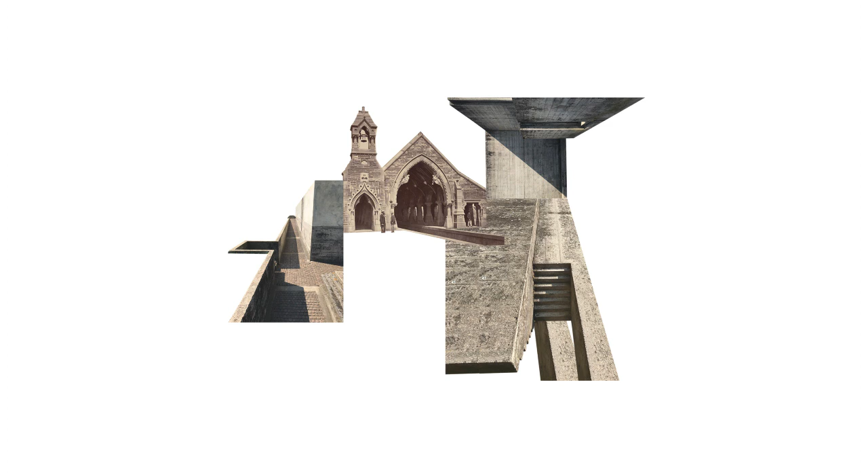This studio explores the junction between utilitarian and civic architecture while testing these conditions through the lens of assisted death.

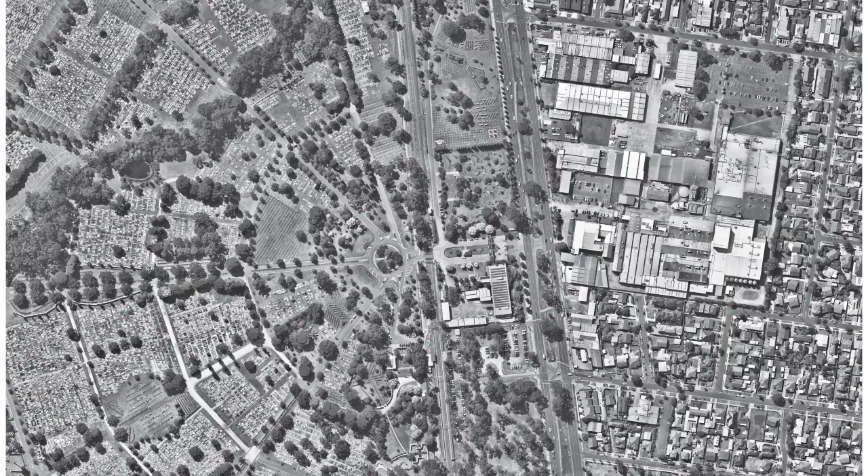Cemeteries inherently are governed by metrics and the utilitarian infrastructure that has been implemented in order to service, access and maintain the necropolis. Fawkner train station opened in 1886 and in 1906 Fawkner Cemetery opened, absorbing into its site the train line and station, a train that provided for the transportation of coffins and mourners, a train station that serviced the city of the dead.

As cemeteries have evolved over time, there is an acknowledgement that there is still a requirement to provide for a variety of forms of burial and remembrance. The predominance of the field versus garden, spaces of inclusion, spaces defined by religious boundaries, spaces defined by acknowledgement type. Each cemetery is accompanied by various additional built programs, such as the flower shop, crematorium and chapel.

With the introduction of assisted death legislation in Victoria in 2019, Greater Melbourne Cemetery Trust are now in the process of understanding how this might be accommodated within their remit. What is the infrastructure that would define this program?

The Design Studio explored the role of the cemetery through the lens of now and the growing requirements associated with death and remembrance. This was balanced with understanding the historical significance of the infrastructure that defines the mechanics of the necropolis and how this might then be exploited in order to define a new appendage to the cemetery.

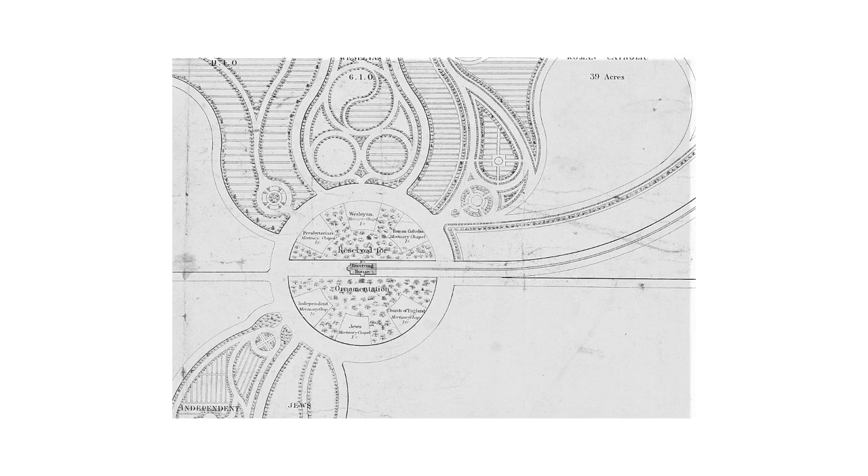Students reference the following precedents: Saint-Pierre Firminy by Le Corbusier, San Cataldo Cemetery by Aldo Rossi, and Brion Cemetery by Carlo Scarpa. These precedents are understood within their original context and then tested within the context of Fawkner Memorial Park. The precedents are then used to inform the formal and architectural language of the interventions that have been designed.

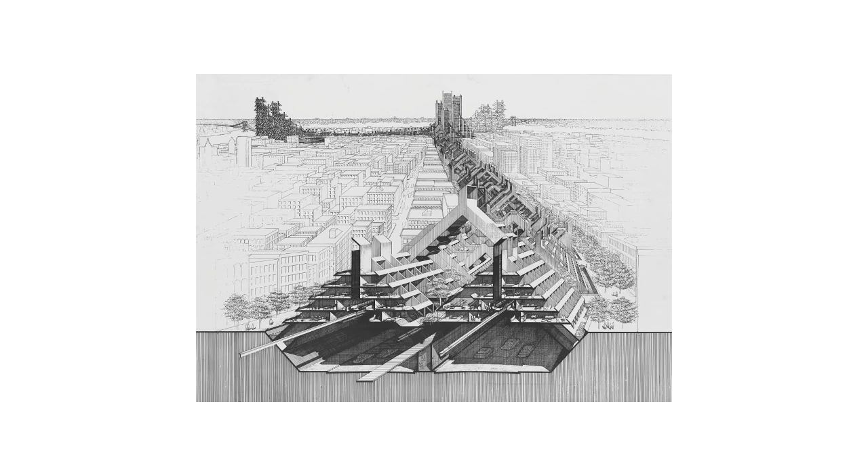Paul Rudolph's sections are employed as a drawing precedent, defining a universal representation style, allowing for the architecture to rise to the top. This is not about death, this is about infrastructure - an infrastructure that supports a civicness, a civic intervention, a civic responsibility.

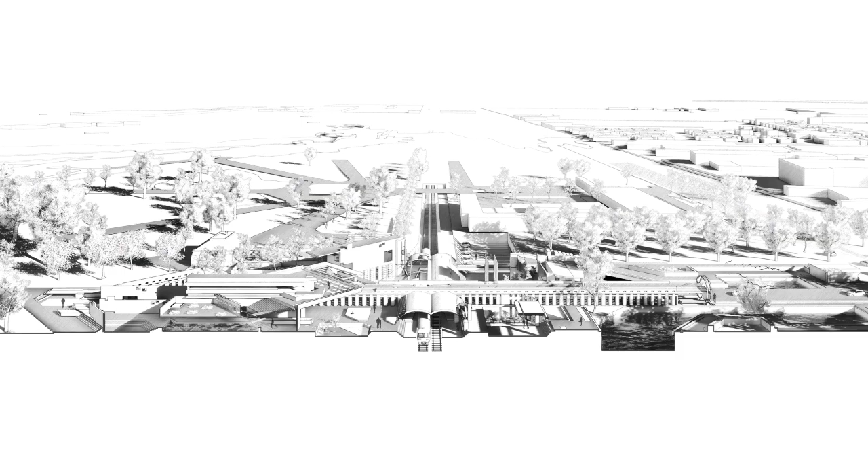The premise of this studio is to investigate the roles and relationships that assisted death has within contemporary architecture. This design intends to impact people's understanding of assisted death by providing a space for acceptance through visual attainment.

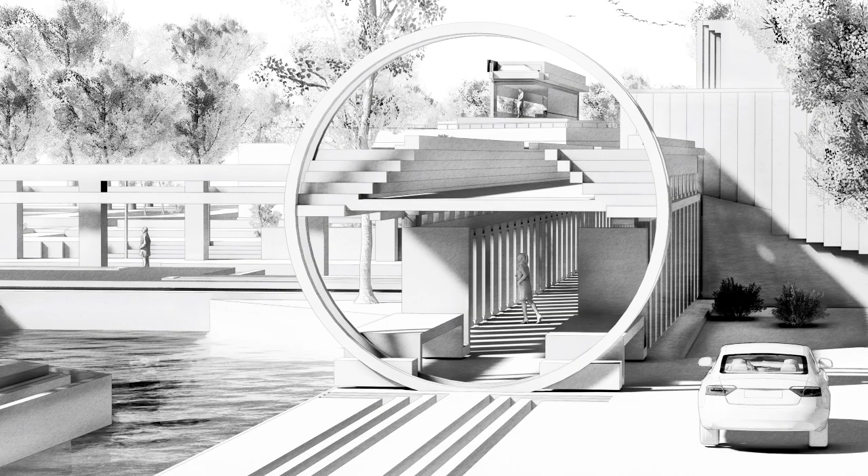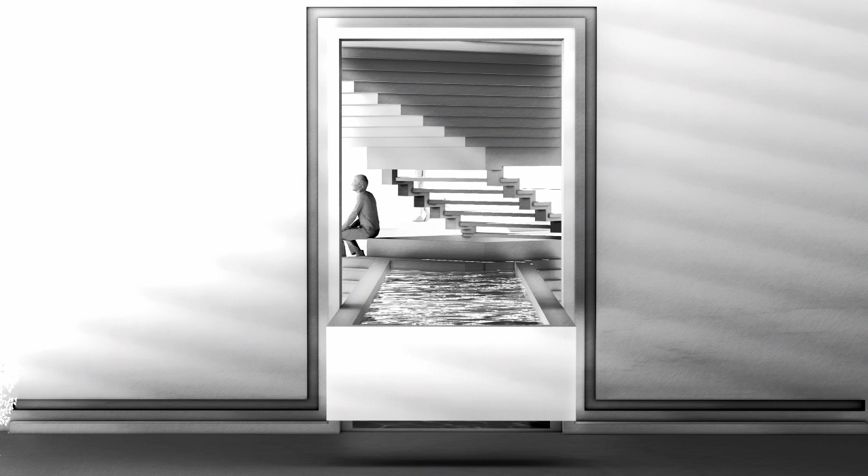Drawing on historical site context and design language informed by Carlo Scarpa's Brion Cemetery, architectural moves relating to explicit and implied space, prosthetic landscape, and curated thresholds all contributed to a final design intending to achieve an architectural outcome that grants the civic user a partial vista into the world of patient autonomy, differing burial techniques, grief management, and reflection.

Hi, I'm Katie. I did the assisted death stream this semester, so for mine I was mainly focusing on pulling apart the historical typology that may challenge the borders of each program. So what makes up the facility of assisted death and what is the necessity?

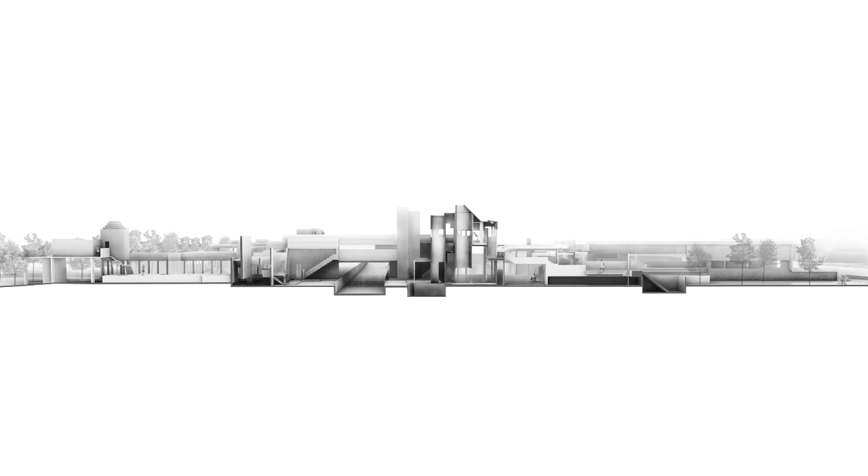So the importance of how landscape and architecture meet and where these in-between relationships occur. By focusing on simple design methods, hallways and natural light are often overlooked design opportunities in medical facilities, or better yet, damage quality of life living in these spaces.

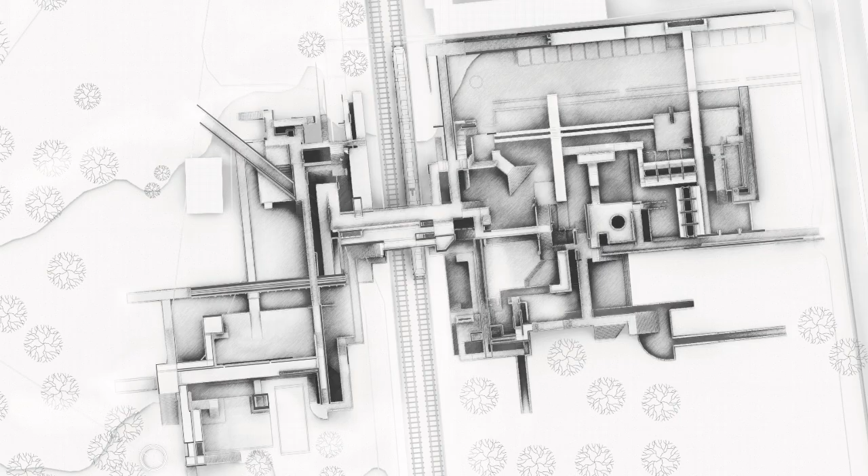So the assisted death facility is not only about a place for individuals passing, but an individual's experience leading up to the passing. Each element plays an architectural role, segmenting with entirely different or other programs. These urban infrastructures may activate the site.

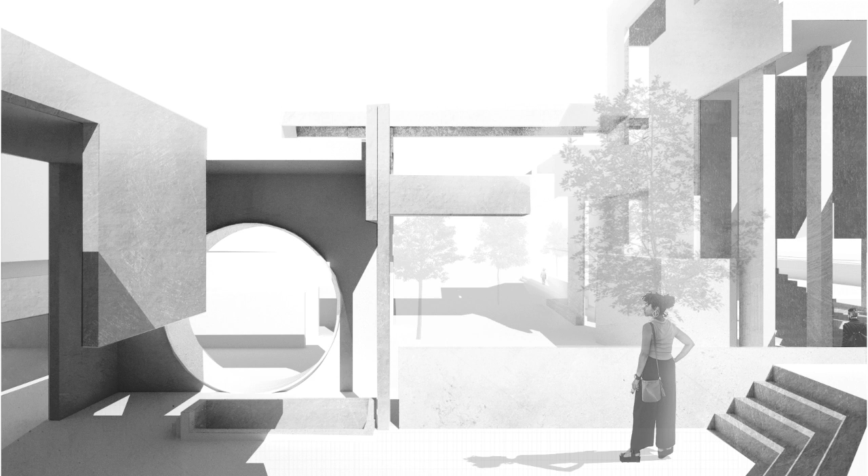A variety of thresholds question where the spaces begin and end, and the in-between create these different scales. And these in-between different boundaries meet and have potential to create new ideas of what a meeting space can be for both the living and the dead. Thank you.

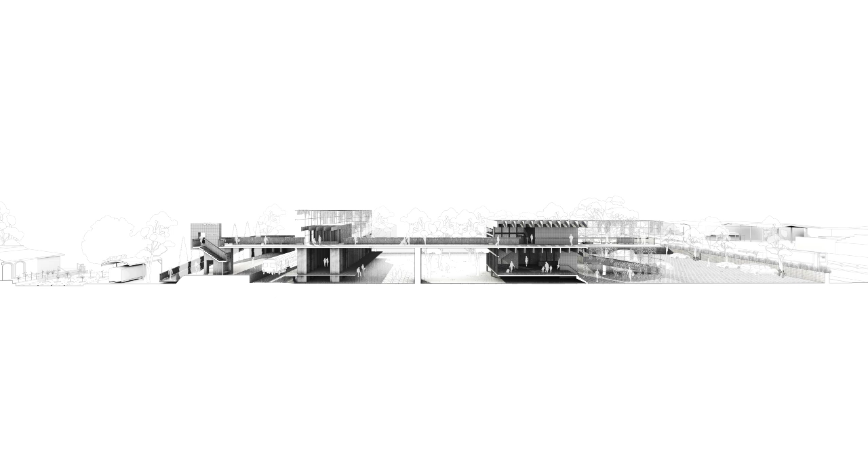Hey, my name's Santoro, and this semester provided an opportunity to address Western society's refusal to discuss death, by testing new typologies that challenge and acknowledge the role of civic architecture and the cemetery.

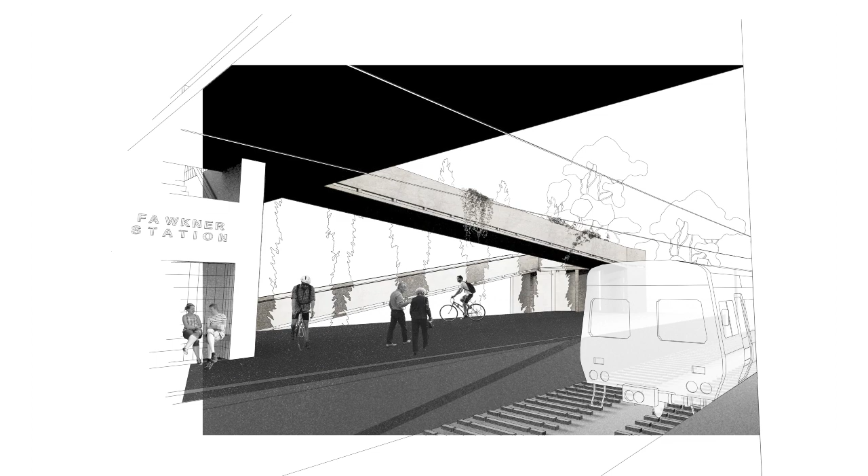My project looked at Aldo Rossi's San Cataldo and drew on the role of the train line to become an infrastructure for arrival and departure that acknowledged both the permanence of Fawkner Memorial Park and its continuing change through a living landscape. The space for dying became an appendage to the medical centre as a way of informing the future of this unknown territory.

Hi, my name is Taylor Walker, and this semester under the framework of cemetery design, I explored the importance of landscape in the hopes of normalising the cemetery through the familiarity of the garden.

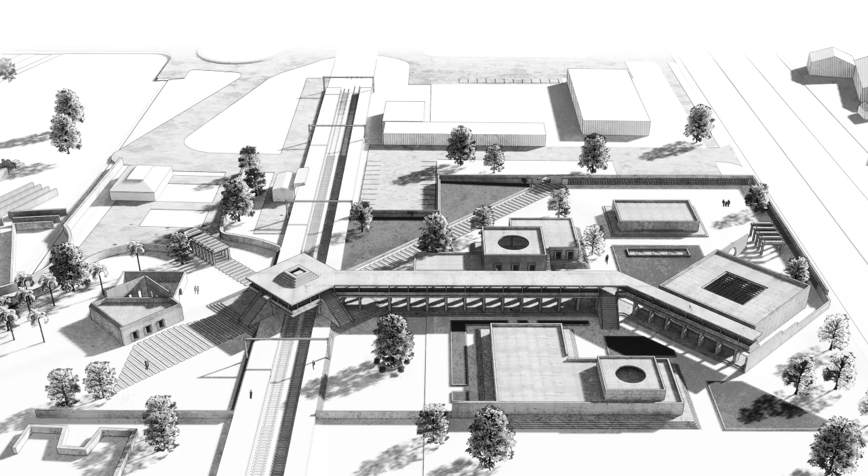My intervention looked at Carlo Scarpa's Brion Cemetery, where I observed qualities that aligned with my own ideas of the site. The existing train line and station were absorbed into the site, servicing the City of the Dead.

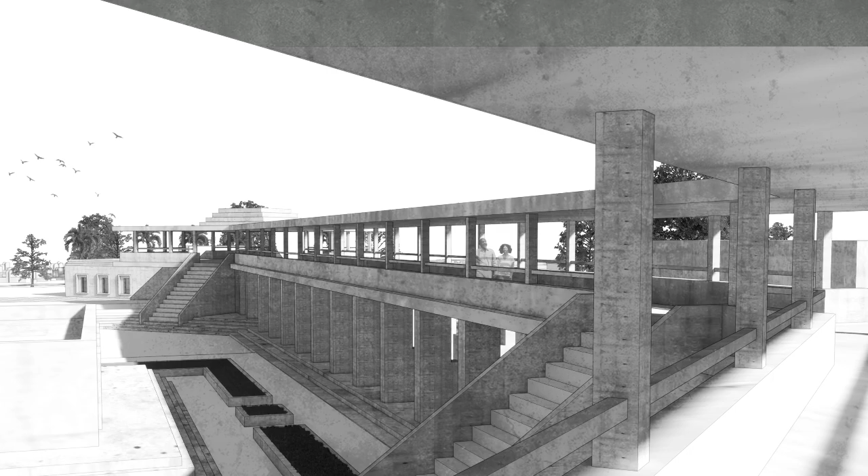My project aims to reaffirm this important mode of infrastructure by using the language of formal gardens to develop a botanic garden of conservation and education, servicing the living and giving insight into what could be a shared and supportive experience for those wishing to pass and their loved ones.

As a reimagined analogy, I view the cemetery as the Library of the Dead, a variation of the Necropolis, a space that facilitates individual exploration and community growth.

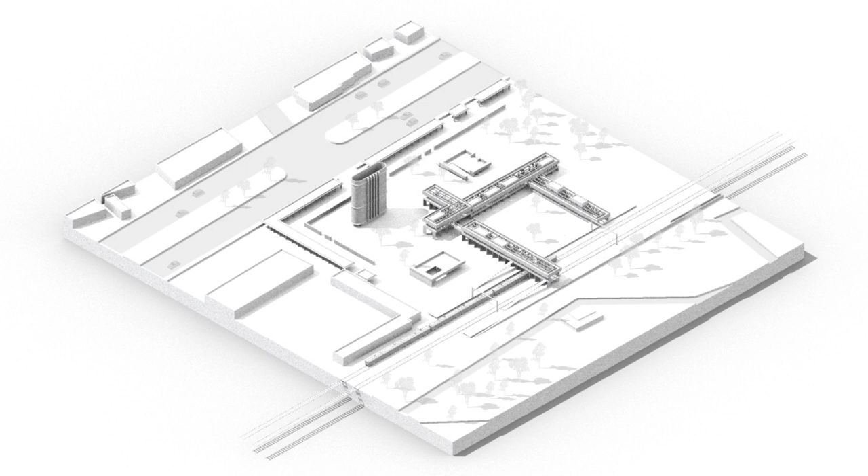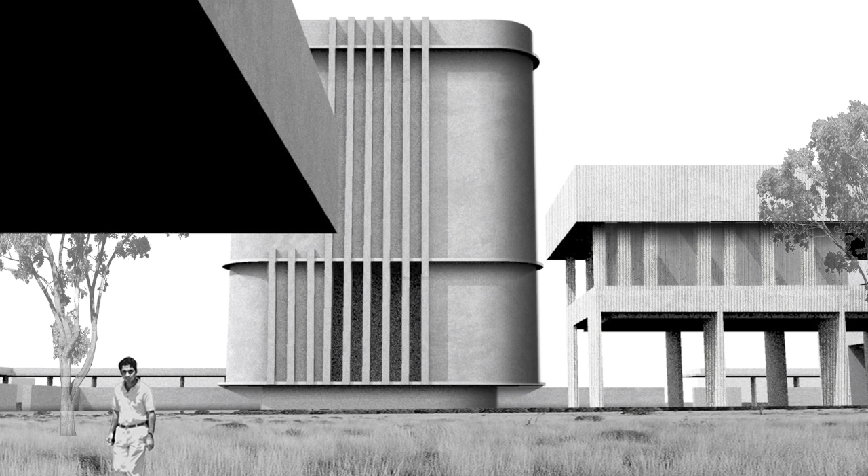With the introduction of unprecedented legislation in this country for assisted death, and using precedent ideology to question whether the site is behaving as civic infrastructure and how it can adapt as Fawkner Cemetery approaches perpetuity, I combine the principles of legislation, analogy, and attitudes towards site to compose a new typology with inherent new attitudes towards cemeteries and their role.

My name is Isabella Magliano, and this response looks at the overwhelming support of assisted dying as a new way to view death, dying, and memory.

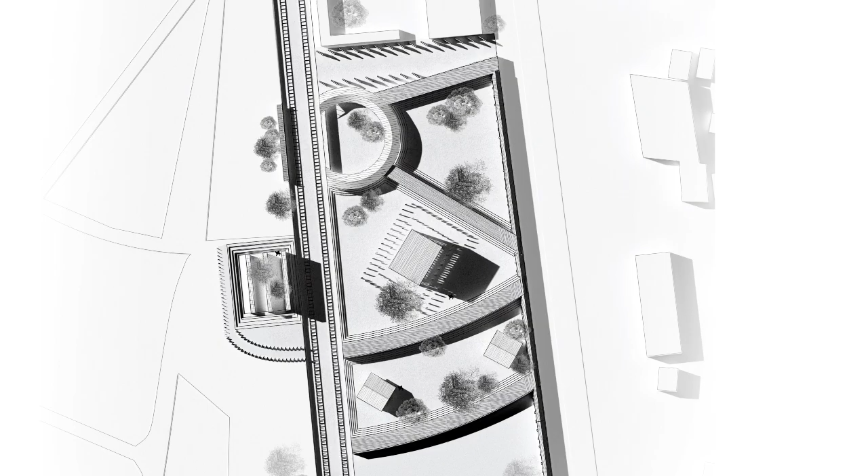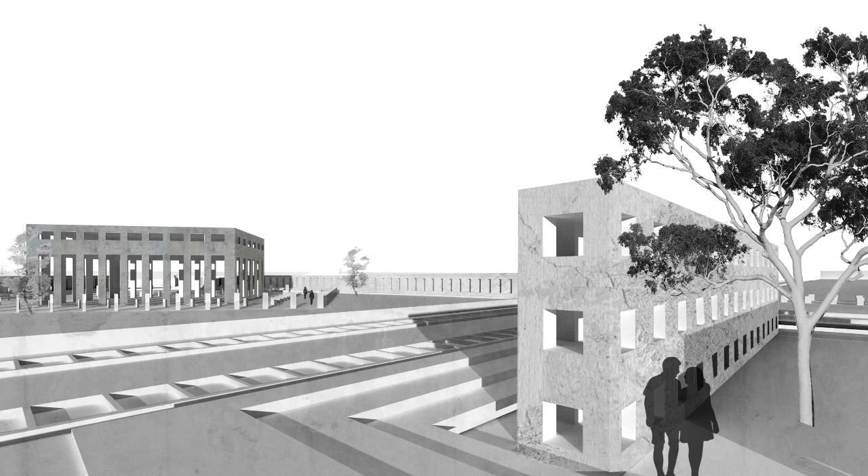Using Aldo Rossi's San Cataldo Cemetery and its intentions in a post-fascist Italy as a precedent, I've continued Fawkner Memorial Park's half spiderweb layout, but inverted, creating a memory of what once was popular, but also introducing a new architectural typology demonstrating the new social and political popularity of assisted dying laws.

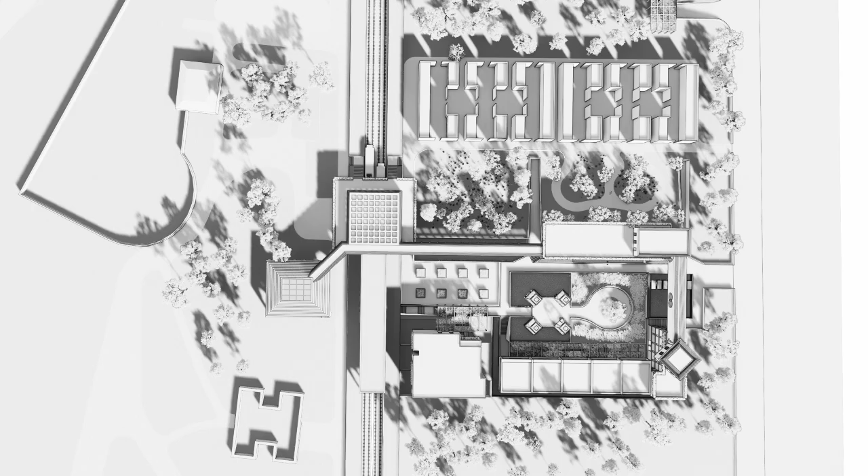Designing an architectural assisted death facility with a strong connection to the landscape became important in so many ways, such as understanding and reflecting. The use of this connection from garden to building creates opportunities to experience more than just a place to die. The strong use of light, form and space with a connection to the landscape influenced my ideas for an assisted death facility.

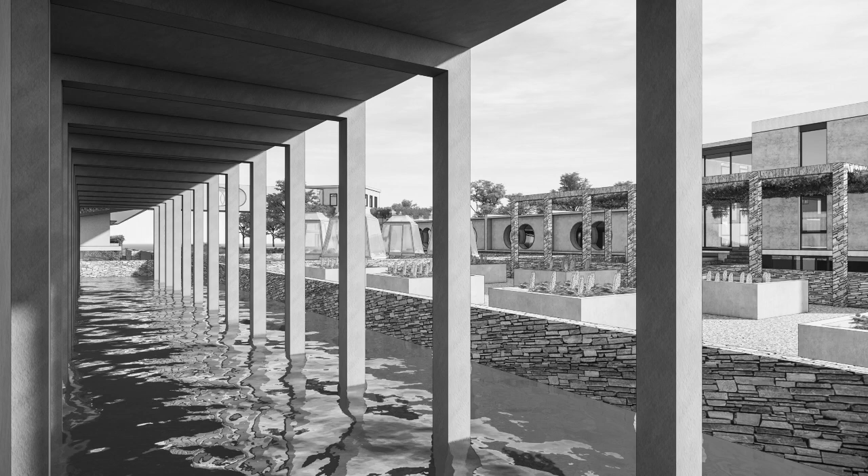Allowing for a beautiful environment to honour life and potentially recreating cemeteries to be a place of celebration.

Hi, this semester I had the opportunity to think about ways an assisted dying facility could work from an architect's perspective. Referring to some research and the precedent Brion Cemetery, I made the site become a space that can save and share the story about assisted dying.

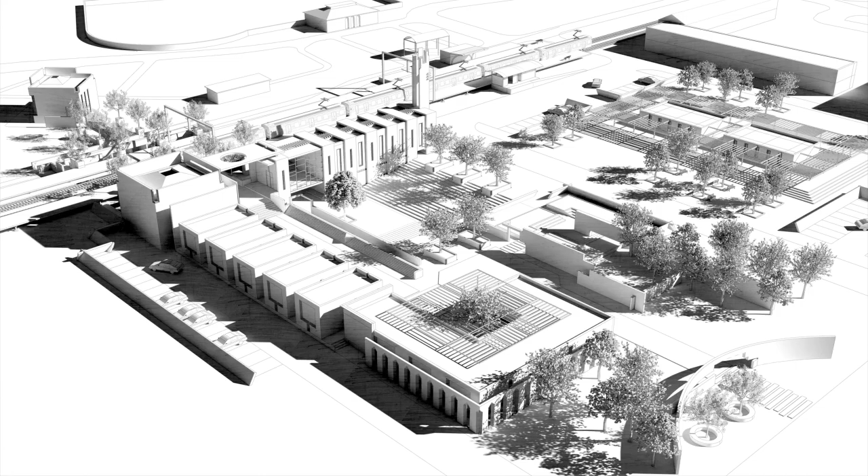The story collected from the person who chose this service can be used to support people who have similar situations, also comfort their family and educate the community.

So this facility focuses more on the mental health of the patient and their families, than promoting the value of assisted dying to the community.